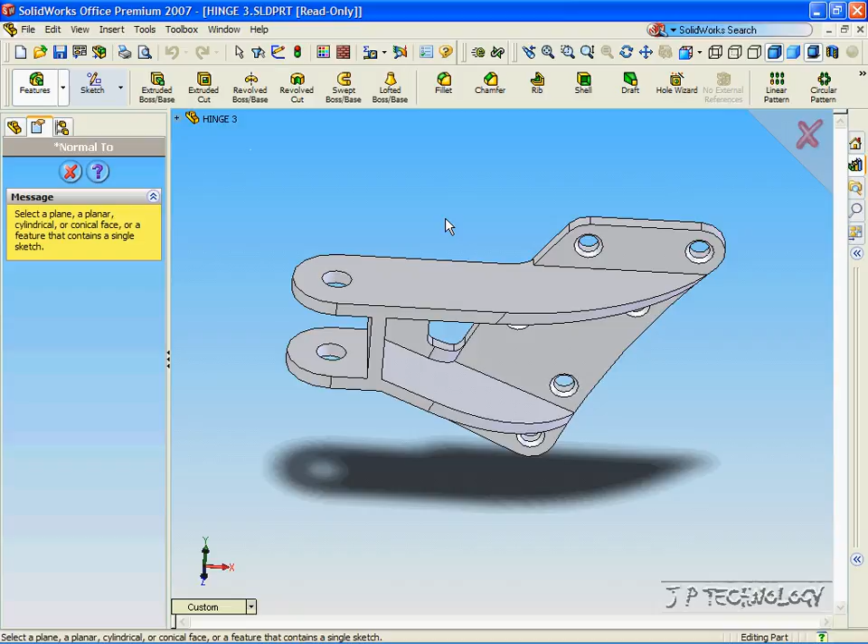Now, the common views that we see in SolidWorks are the front, back, left, right, top, bottom, isometric, trimetric, and dimetric views. There's also a normal to view, which when we click a planar surface, we get to see the view normal to that planar surface.

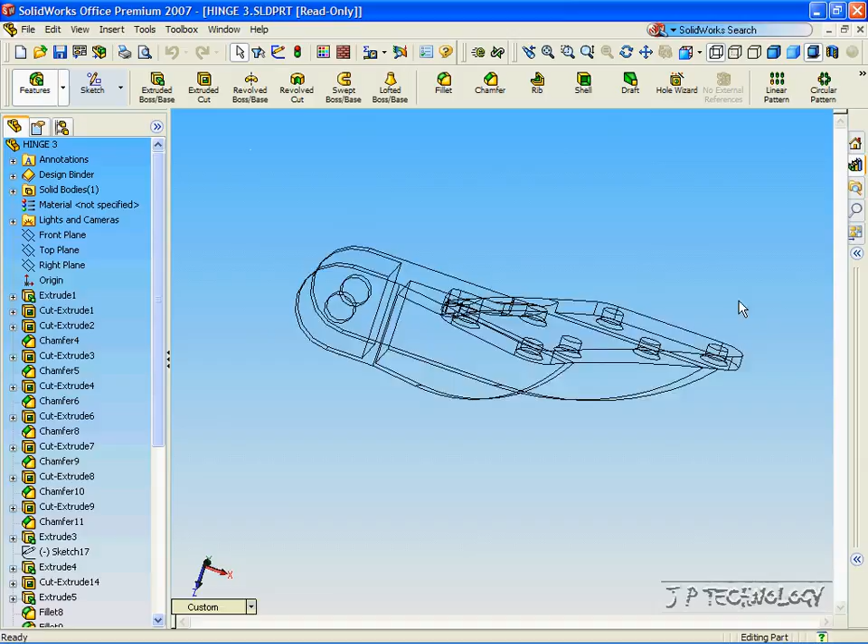Now let's click the isometric view. Most commonly in SolidWorks, we experience the shaded with edges view. The wireframe view shows the object only by its edges, represented by solid lines. The hidden lines view is the same, except any line which isn't visible is represented by dotted lines.

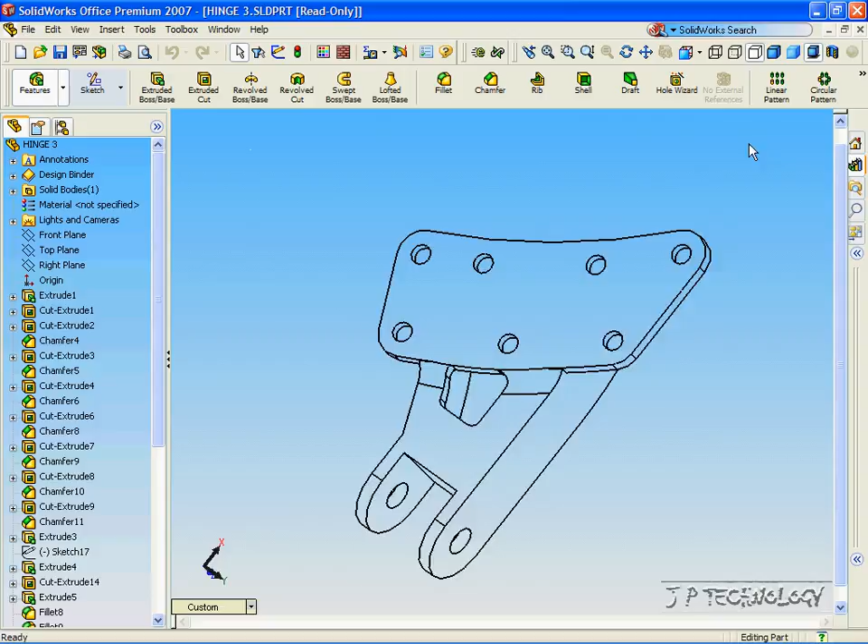Now, the hidden lines removed view just shows the outside sketch of the drawing. The shaded with edges is what we're most commonly used to. Then there's just shaded, and shaded with the shadow or without the shadow.

Now let's click shaded with edges view, and let's click the section view. Click the isometric. With the section view, we're able to see just a section at a time of how much of the part we want to see.

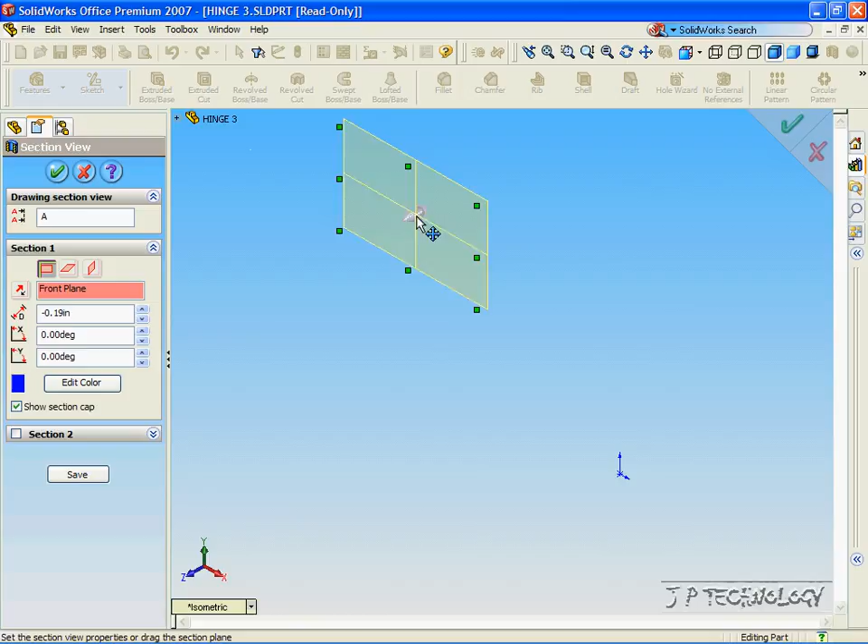We can see the front plane from the top plane or the right plane, and we're able to move the section view with the arrow. Now we're also able to move the degree of how much we see of it.

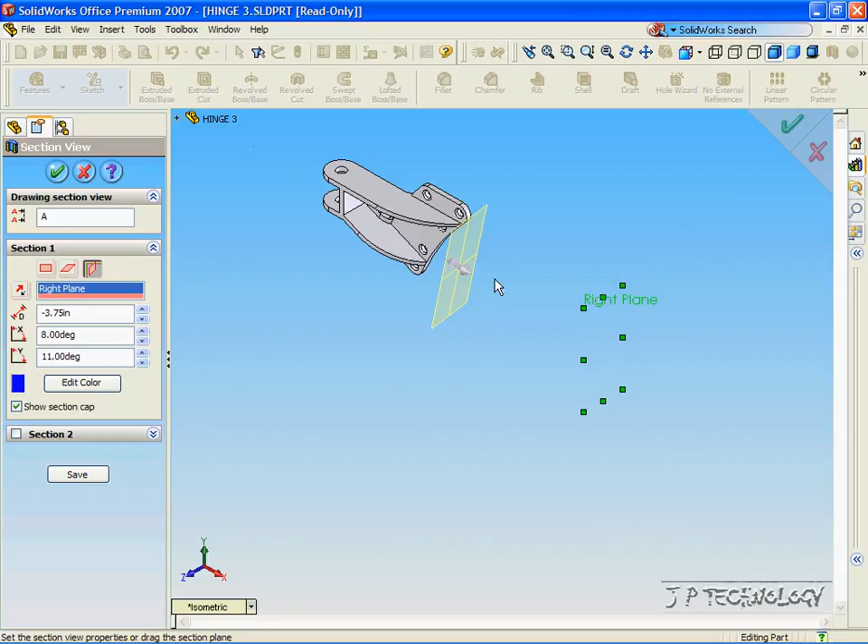So let's tilt this back, and now it cuts in on an angle. So say we only want to see this much of the part, click OK, and now that's all of the part that we see. To get the rest of the part back, click section view again, and it's back.

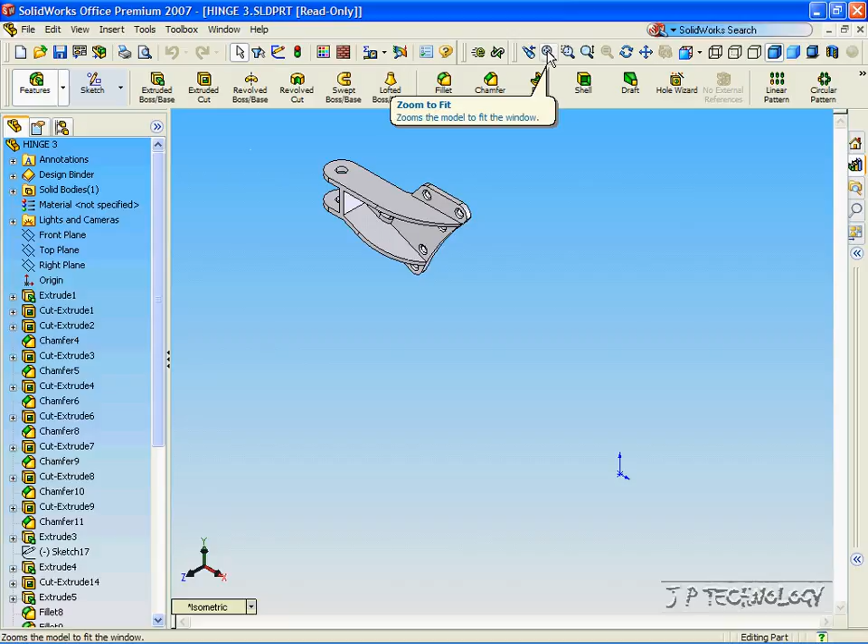Now we also have a bunch of view tools: zoom in and out, zoom to area, zoom to fit, and the previous view. The previous view, when clicked, goes back to the last view we were at, which was the isometric. The zoom to fit brings up the part the best way possible, giving you the best image, biggest shot of the part.

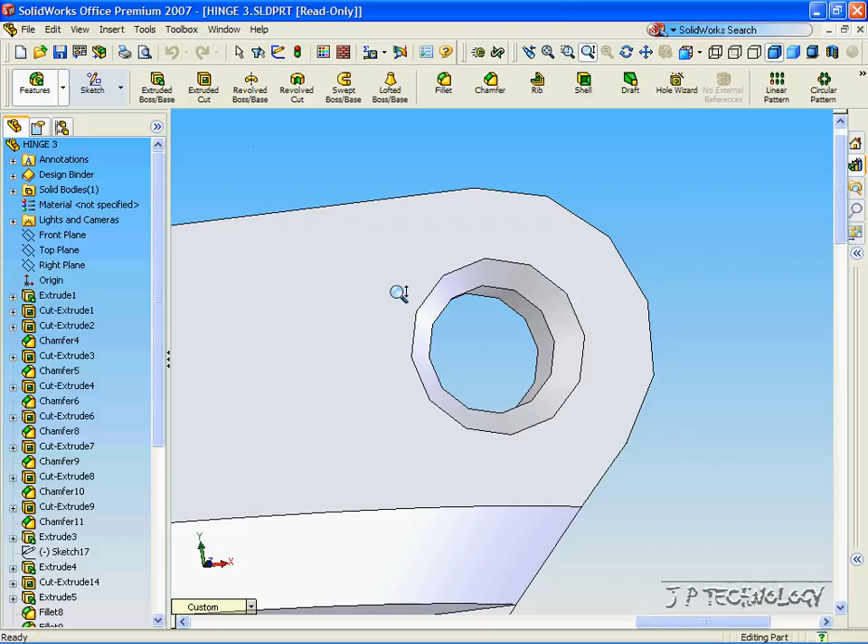Now the zoom to area is, say I want to get into one of those circles. Drag it, make my little window, and that window comes up. Then the zoom in and out, I click, and when I pull towards me, it goes away. When I push forward, it comes in.

Now, instead of using the zoom to fit tool, like the zoom in and out tool, on my mouse I have a roller. So when I roll forward, it goes away. When I roll towards me, it comes towards me.

And there's also the rotate view. You just click on the object and you can rotate around. And then there's the pan view, which is just moving the object any which way.

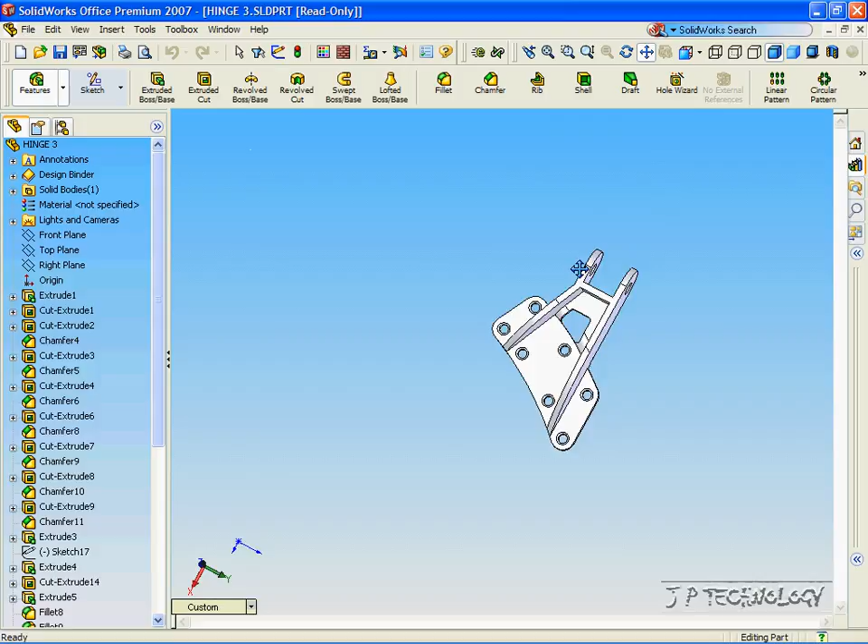Now let's go back to the isometric view. And there you go. That's all the views within SolidWorks.